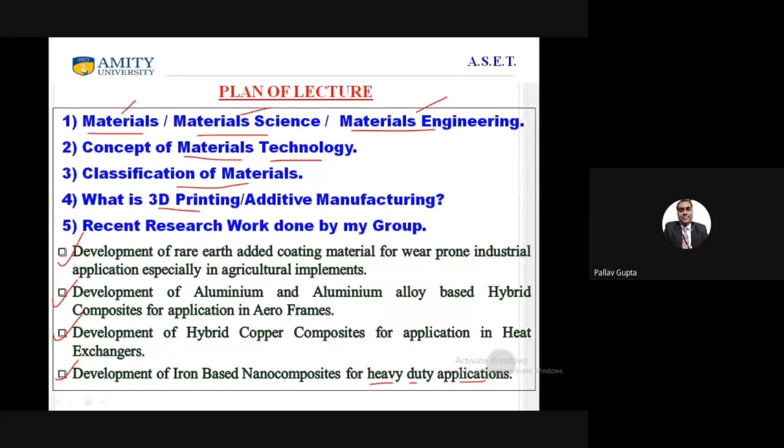Let us now start with the main stream, wherein we will be discussing the basic difference between materials, material science, and materials engineering.

When we talk about material, it is basically any substance which is implemented or used for humans, and when used for humans, these materials basically give comfort. Comfort can be in the form of using that material for a product, for any appliance, for any innovation-based invention, for various structural applications, for different construction industries. So a particular material or class of material can be used in different types of applications.

Apart from that, they are also used as concrete, steel, glass, rubber, aluminum, copper, paper, and plastic. So all these materials listed here are essentially important for making the life of a particular human comfortable.

Materials which are being used, whether for industrial applications, domestic applications, or research and development, all these materials are somewhere or the other providing a high amount of comfort to a particular class of human being, or serving mankind.

Now what is the next thing? That is material science. How is material science important? First of all, let us try to understand what is science.

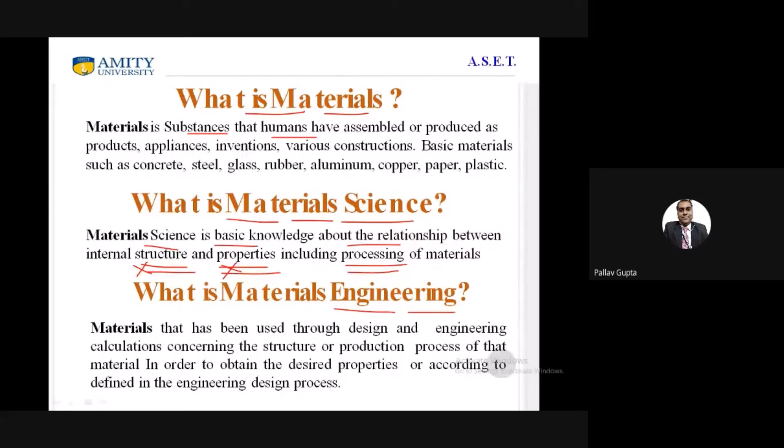If we talk about the concept of materials technology, which is a very important topic, it is a combination of several things. It is having a basic knowledge of material, knowledge of structure, property, manufacturing, and efficiency of engineering materials, and also knowledge of various types of material.

Above all, when these three parameters - material science, materials engineering, and the concept of materials technology - are considered, there is a coordination or correlation in establishing a relationship between structure, properties, efficiency, and processing, which will definitely produce a material that provides strong support to society.

So this establishment between structure, properties, efficiency, and processing is a four-pillar concept. The correlation between these four pillars will definitely lead to the development of a new material that will support our society.

Now if we give a recent example, if we talk about the challenges we are facing - our defense sector or defense technology is receiving a lot of challenges nowadays. I was in a meeting at DRDO a few days back, discussing one of my projects with them. They said that every day DRDO people are facing a new type of challenge, and they always want a concrete answer.

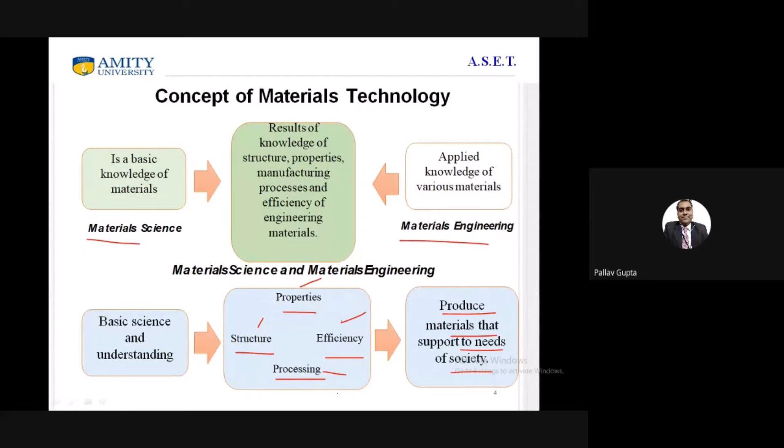That concrete answer should be supported from these four parameters - structure, properties, efficiency, and processing. So these four parameters need to be touched upon while discussing any particular application.

Now this particular coordination - this correlation and coordination - is certainly very important. What is basically the correlation or coordination, and how can it be established for a new class of material or for advanced materials? Let us try to understand.

First of all, when we talk about the usage of any material, we have to always start with the conceptualization of the effectiveness and behavior of each material. The effectiveness and behavior of each material will basically depend on three parameters: first is the structure, second is the property, and the third is the processing.

So what is basically the structure? What is basically property? What is basically processing? Structure means the interatomic bonding, or the interatomic variation of different particles which are constituting a particular body - that is essentially defined as the structure. Now, how does this structure play a very important role?

Suppose I am fabricating a nano composite. When fabricating a nano composite, it is essential that the matrix as well as the reinforcement, which we are using as an essential part of a nano composite - any one of the two, most probably the reinforcement - should be there in the nano form.

Nano form means less than 100 nanometers. It should essentially be less than 100 nanometers. If it is essentially less than 100 nanometers, then only we will be discussing the variable form. Variable form means we will be talking about the variable type of the property, and this property will definitely be dependent upon the size of the nano reinforcement used to form a nano composite.

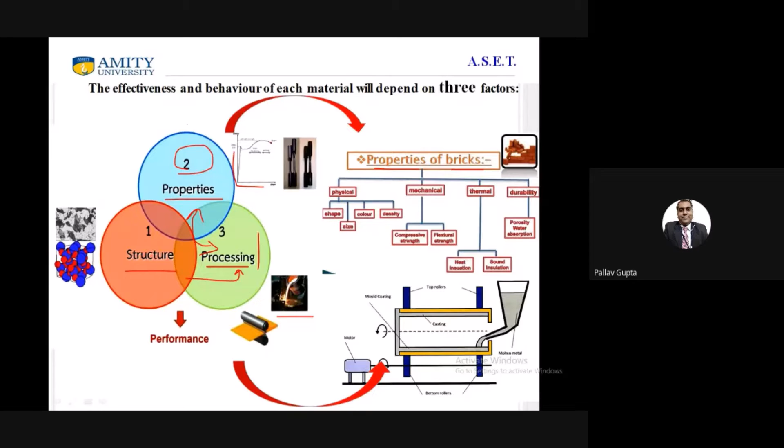Now let us try to understand the structure of a particular material. At a very basic terminology level, an atom is basically having the proton, neutron, and electron. From the atomic theory, we start up and move to the nanocrystalline phase.

We are going towards the crystalline phase, towards the bulk phase, and now developing different large scale classes of materials. All these large classes of materials are essentially important for the structure determination of any material.

If we talk about the basic ideology for a particular structure, they are basically of two types: first is crystalline, and the second is non-crystalline, which is also called amorphous.

One of the core subject areas for determining the structure is to study the microstructure. At the initial level, we look at the type of grain and how the grain boundary movement occurs, which is the structure relationship.

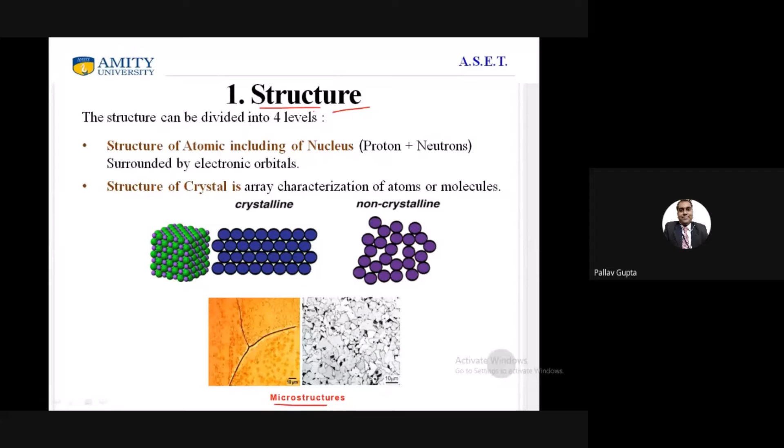We also have to look at the percentage porosity, and another important term along with porosity is the percentage purity of different types of materials. So different percentage purity of materials, structural variation, microstructure evaluation, and technological innovation being used — that is basically the discussion of the particular structure.

Now the next important thing is property. Property means the characteristics, and we have different types of properties to look upon: chemical property, physical property, mechanical property, thermal property, electrical property, and magnetic property.

For determining properties, we have compression, tension, shear, torsion, and bending — different types of tests performed under mechanical property. Mechanical properties are very important because to understand the load carrying capacity of any material, we first need to determine its mechanical property. So for evaluating different properties, we perform different types of tests, and through these tests we get desired properties, sometimes desired, sometimes undesired.

If we are getting undesired property, we have to again start from the lower end, and we have to fabricate the material and come up with that particular subject area.

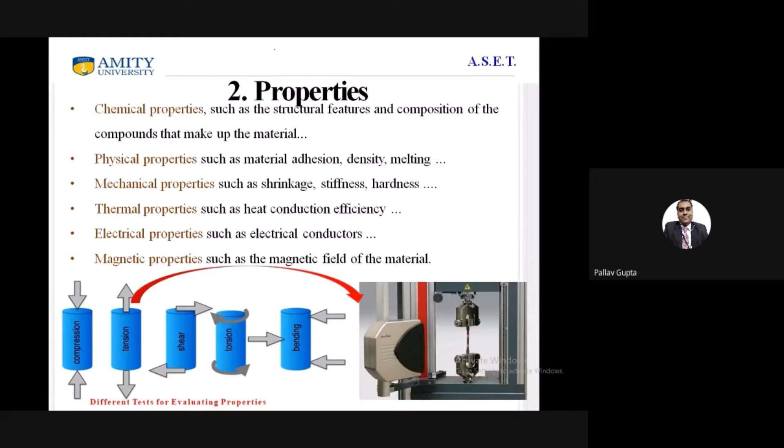Another important thing is the processing of the material. Previously we processed the material by basic processes like forging, die filling, punching, or deformation. We are using different types of processing techniques.

By using different types of processing techniques, we will definitely get different types of microstructural change. This microstructural change will definitely affect the material property. So the material property will essentially be affected by the different processing routes by virtue of which we are fabricating any class of material.

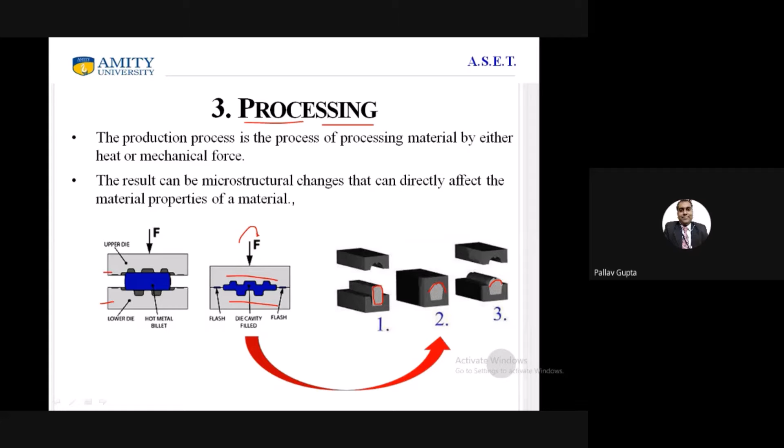So it is basically a step-up process, meaning we are moving step by step - step 1, step 2, step 3. We are moving in different steps, and we obtain the processing route by virtue of which we are moving forward.

Previously I have talked about the structure, the processing, and the properties - all three things I have already discussed beforehand. Now, one term which has just arrived is performance. What is this performance? Performance means the level of competence or degree of competence by virtue of which we can adjudge the suitability of any product or component.

In normal or layman language, how will we talk about performance evaluation? We talk about performance evaluation of any material when we say, okay, we are talking about a new class of material, a new derivative, a new structure, but ultimately, how long will it sustain? How long will it be suitable?

Then comes the concept of sustainable manufacturing. In layman language, sustainable manufacturing means that whenever you are fabricating a new class of material, how long will it be able to serve in application?

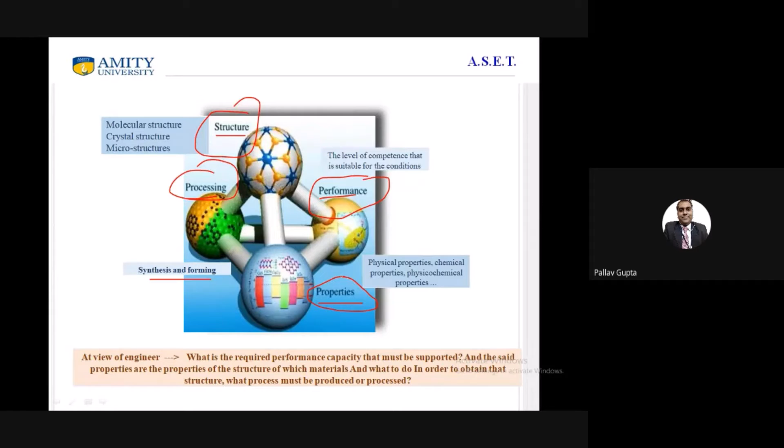Now I'm moving forward slowly towards the mainstream topic, which is the class of advanced materials. Beforehand, I have to talk about the materials we all know about. We are talking about different classes of materials, like metals, polymer, and ceramic, and by virtue of engineering ideology, we are coming up with 3 new classes of materials important from the engineering point of view, that is composite, semiconductor, and biomaterials. These are 3 classes of materials essentially important for our future directions, talking about our future directions in our present R&D field.

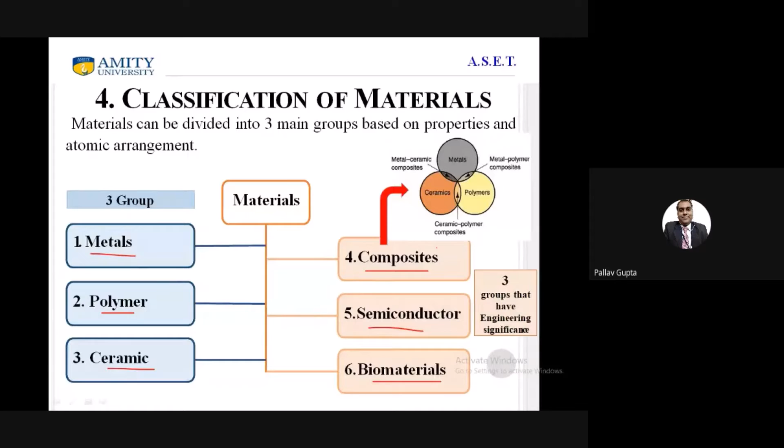So what is basically metal, polymer, and ceramic? You all are aware that metals are of ferrous and non-ferrous type. Polymers are thermoplastic and thermoset. Then we have ceramics, which are basically able to withstand high temperature. Then we talk about composites, which are basically a combination of matrix and reinforcements.

And then finally we talk about semiconductors, which are basically the resultant of doping. So N-type, P-type dopings are there, intrinsic and extrinsic semiconductors are there, holes and electrons are there, one providing the charge carrier, the other providing the pathway. And then we are fabricating miniaturized devices, called semiconductor devices. Long back we had very big semiconductor devices, but now we are talking about the concept of miniaturization, dealing with operational amplifiers, resistors, capacitors, transistors, diodes, integrated circuits. All these parameters come under the category of semiconductor devices.

So the last topic, very much important over here, is talking about biomaterials. Bioimplants were essentially very important previously, and now they have become essentially more important when we are talking about 3D printing technology.

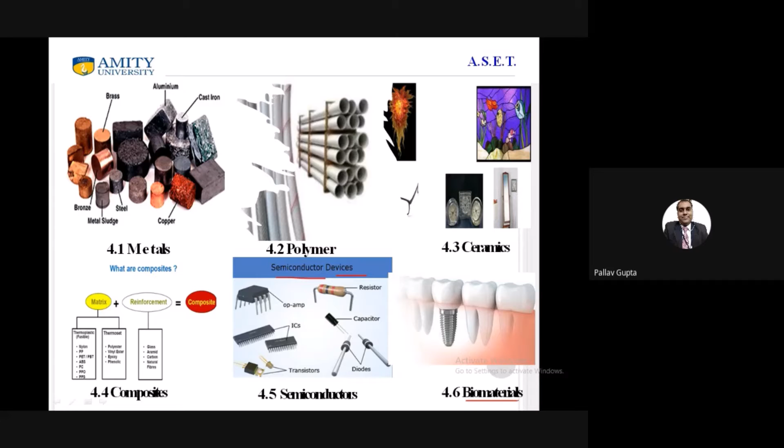In 3D printing technology, because it is a cleaner, safest, easiest, scrap-free technology, nowadays biomaterials are becoming more important for various types of bone implants, for teeth growth, and joining of bones. All these things have become quite easy while using biomaterials. So this concept of biomaterials, or biomaterials being used in additive manufacturing, is becoming a very important field nowadays in the biotechnology issue. This is very important.

Now, what is basically composite material? Composite is basically a combination of two materials, in which one is the matrix phase, and the second is the fiber, filament, or reinforcement. It basically has good shear properties. Along with that, it has high strength, high stiffness, and low density properties, which are very important for all of us to understand. Another important thing is the classification of composite material.

The classification of composite material is basically on two bases: first is the matrix itself, and second is the reinforcement. When we talk about the matrix, it can be metal matrix, ceramic matrix, polymer matrix, and sometimes carbon-carbon, and then we talk about hybrid. Hybrid materials nowadays are becoming more in fashion and more in use because of their unique characteristics.

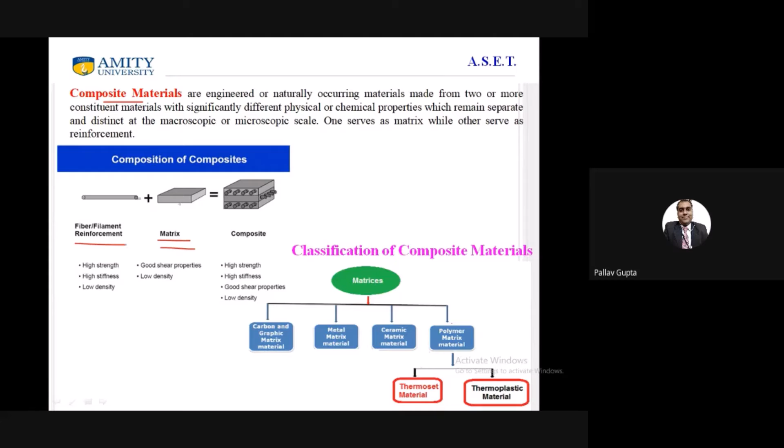So when we talk about the classification of composite material, we have metal matrix composite, polymer matrix composite, and ceramic matrix composite. In metal matrix composite, the matrix is metal, and the reinforcement is ceramic material. Metal matrix composite was initially developed around 30 years back, but nowadays we are moving forward to hybrid metal matrix composites, in which we use at least 2 ceramic reinforcements, each having its own utility in providing added benefits to the metal.

Another important field nowadays, used in the current scenario of 3D printing and additive manufacturing, is the usage of the alloy matrix. Previously we were using simple metal, but nowadays we are basically using a matrix made up of alloy, having different reinforcements. Sometimes we use graphite, sometimes silicon carbide, boron nitride, and so on and so forth.

Then comes the second important class of material, the polymer matrix composite. In polymer matrix composite, the matrix is of polymer itself, and we use a ceramic reinforcement, having basically glass fiber and whiskers used as reinforcement in this polymeric material. A large class of polymeric materials exists nowadays, and the basic idea behind using this polymeric material is that it has a low melting point and enhanced properties. So polymer matrix composite is becoming a very important class of material.

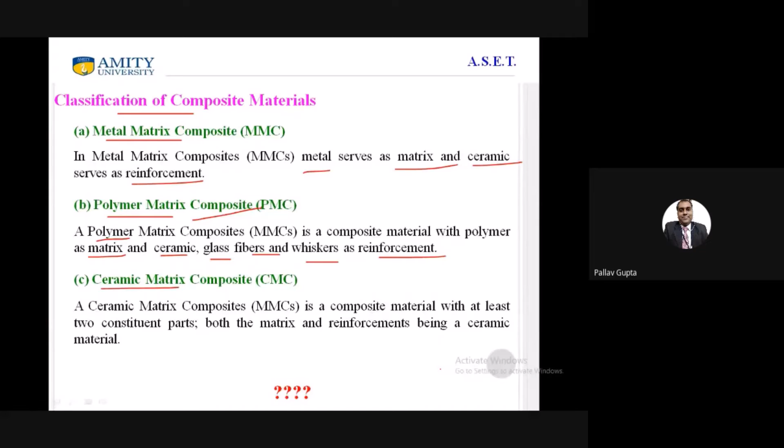Now the third important class of material is the ceramic matrix composite, also called CMC, which has both the reinforcement and the matrix made of ceramic material itself. Conventionally, we use the powder metallurgy technique, an old technique in which we do ball milling, pressing, then compaction, and then heat treatment. The final product requires the least finishing operations.

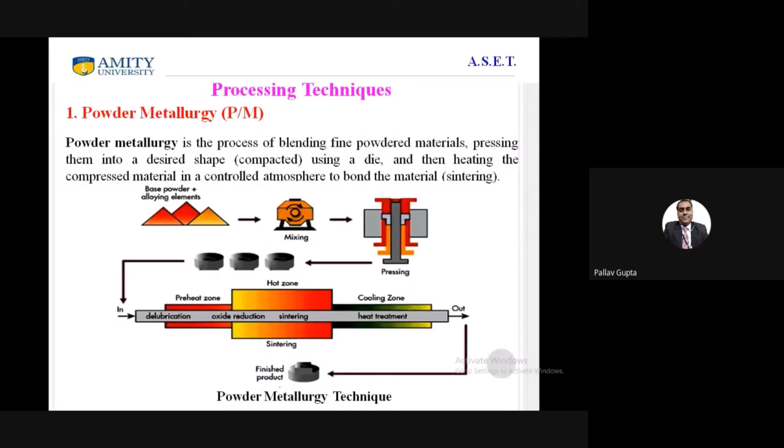Then we have the stir casting technique, in which we use a stirrer or impeller with molten material. The stirring takes place, and finally we get an output after solidification in a particular mold or die. I've spoken about this process in two lines, but it's not actually a two-line process; it has a large number of variables being used and discussed for this particular technology.

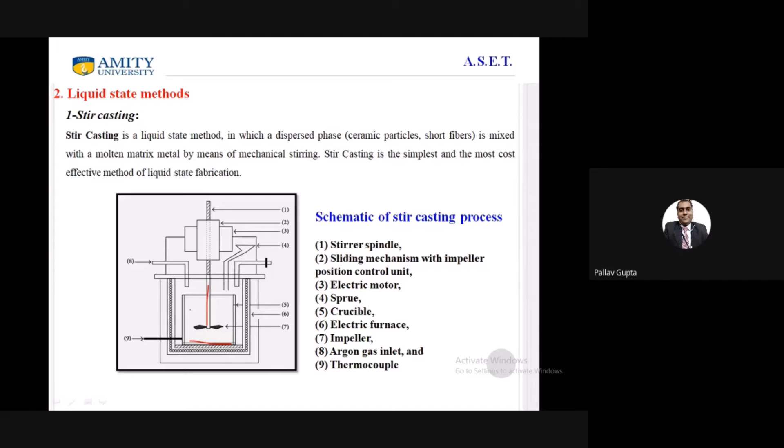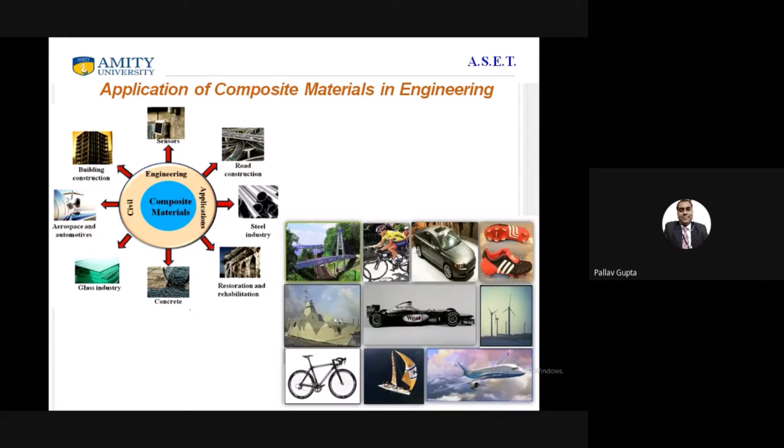Some other areas include bicycles, automobiles, shoes, different cars, ship hulls, marine, spacecraft, windmills - everywhere we are using this particular class of material, the composite. And not only metal composites, but polymer composites are also being used at variable scales.

Another important class of material used here is smart materials. Because we are moving forward to advanced materials used for additive manufacturing, smart materials are desperately being used, and they change themselves according to the environment. They respond to different types of changes that are formed in a set.

Somebody is speaking. Somebody is asking something.

Is there somebody asking something? I am hearing some voice. Okay, so I shall proceed further.

In this, what happens is there is a material which is having changes occurring according to the environment wherever they are operating. They are basically responding to changes which are set beforehand in a particular class of material. So nowadays in smart materials technology, the green building concept is being used in the field of additive manufacturing. This is basically an outcome of smart materials also.

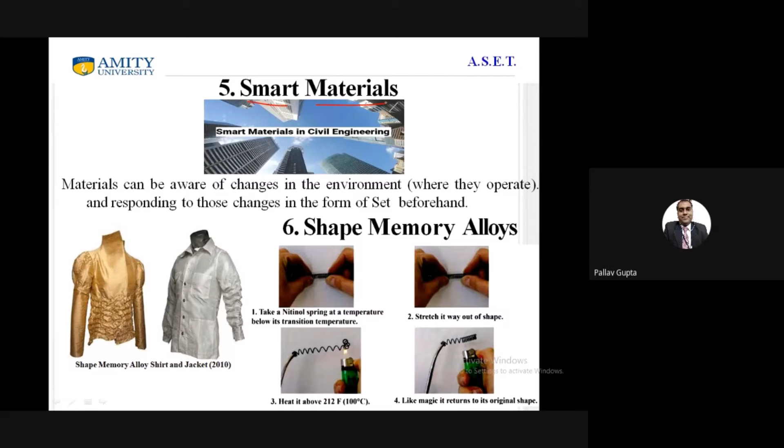Apart from smart materials, we have the next important class of materials called shape memory alloys, like the nitinol spring. At a temperature below its transition temperature, when we stretch that nitinol wire and apply heat to it, the nitinol wire comes back to its original shape. Similar is the concept for the shape memory alloy shirt and jacket, which was manufactured in the year 2010, almost a decade back, when this different type of class of material was essentially being manufactured, and a new era of smart materials was being used upon.

Now the last important area is nanomaterials. Sometimes it is written continuous, sometimes with a space, and it is a small diameter material whose diameter is not over 100 nanometers. So in nanotechnology, the material will always have a diameter below 100 nanometers, and it basically has a high ratio of surface area to volume.

So when you have high surface area to volume, it gives a large amount of strength to any material by removing the porosity or voids in between, and it will always result in physical or mechanical properties that are different from the bulk class of material. So when using a bulk class of material, the properties are different. When using a nano size material, the properties are extremely different.

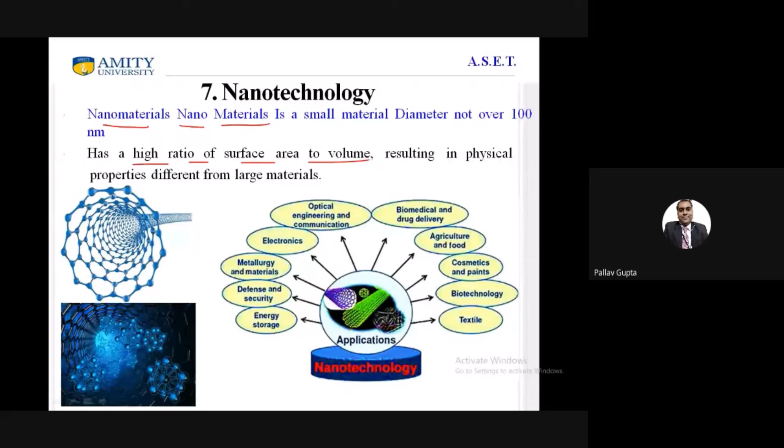This particular class of material has a different point of discussion, and these different points add value towards different fields of discussion, like optical engineering, communication, biomedical, drug delivery, agriculture and food, cosmetic and paints, biotechnology, textile, defense and security, energy storage. So there are different areas where nanotechnology is used, and these can be used in different domains, like they are now being used in the area of additive manufacturing as well.

So we are now done with the first part of today's lecture, where I discussed the basics of materials technology, why we talk about materials technology, what is the outlook of materials technology, and what are the different processing routes on the conventional side. We have talked about these many processes.

Now the next part of today's lecture will focus on what basically 3D printing or additive manufacturing is. There is a huge requirement in today's scenario where we want minimum amount of scrap out of any manufacturing process. So we require the minimum amount of scrap out of any manufacturing process being used today. And the solution to this is that we have to use 3D printing technology or additive manufacturing.

Now, somebody from these participants can suddenly ask me, what is basically 3D printing? What is basically additive manufacturing? Why is it called additive manufacturing? Why not something else?

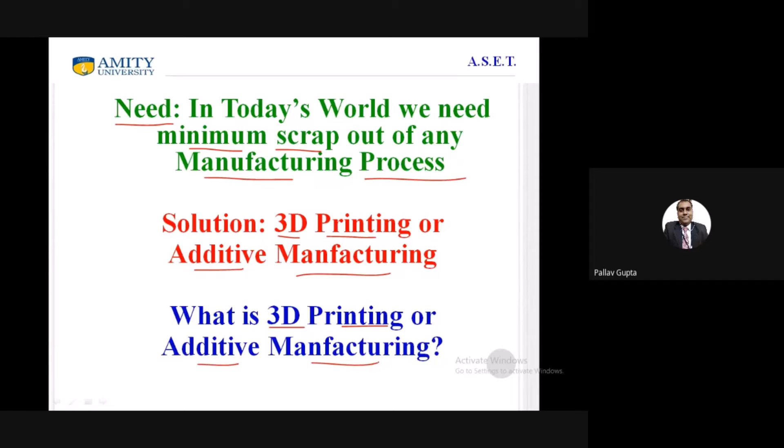This is called the scrap. The material which is removed is called scrap. Sometimes the quantity of scrap is very less, sometimes it is very high. Most often when the quantity is very less, it will go as waste.

So in this concept of metal forming, the scrap which is generated often goes into waste.

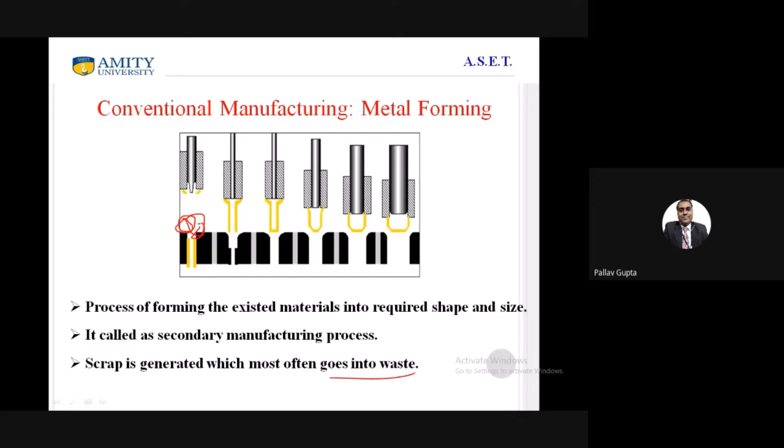Now what are the different types of manufacturing? The different types of manufacturing are, first the subtractive, second the additive. Till date what we were using is the concept of subtractive manufacturing. I do not know how many among yourselves are aware of this concept.

This waste material which is generated, nowadays in the current generation we cannot accept it. We cannot waste such a large quantity of material because the available resources are getting depleted. So we have to move with plan B.

That is, we have to talk about the concept of additive manufacturing. In this concept, we are using a material, and layer by layer, or layered deposition, takes place as per the program or set of instructions given to a printer. Then a final product will be formed, which is called a 3D object.

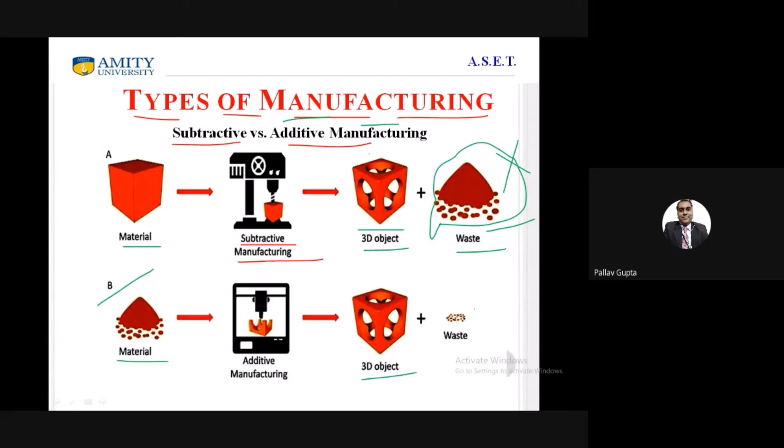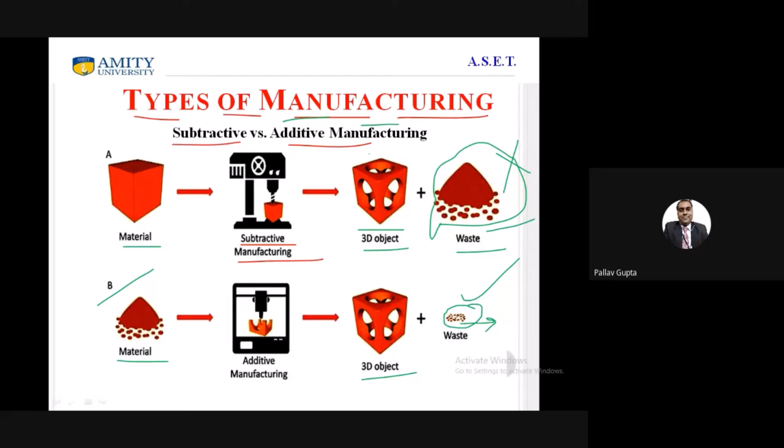And a very small amount of waste is generated, which is called the scrap. This scrap we can again recycle and use, but using a technique that should be economical as well, an economical manner in which we can fabricate.

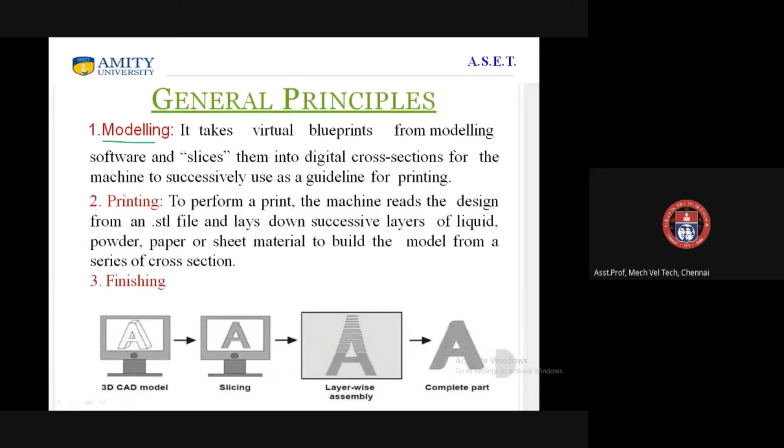Now, modeling, printing, and finishing - these are the three concept lines, or these are the three stages.

I can hear some voice. Dr. Shekhar?

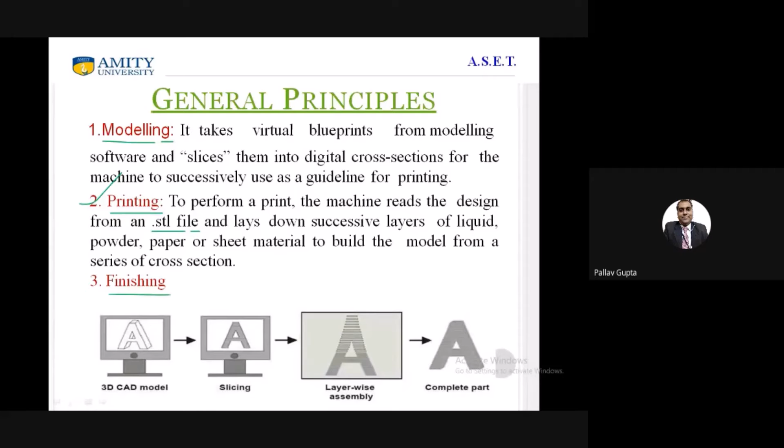Then we have the third step, called finishing. In finishing, the product or object that has been fabricated is finished upon, and a very small amount of material is left behind, which can also be recycled. So we have seen how 3D printing takes place.

3D printing takes place by the perpetual motion or movement of the designated slide from left to right or right to left, and the printer forms the item by depositing material in layer form, starting from the bottom and going to the upper end. So every time we use 3D printing technology or additive manufacturing, it always starts from the bottom end and moves to the upper end.

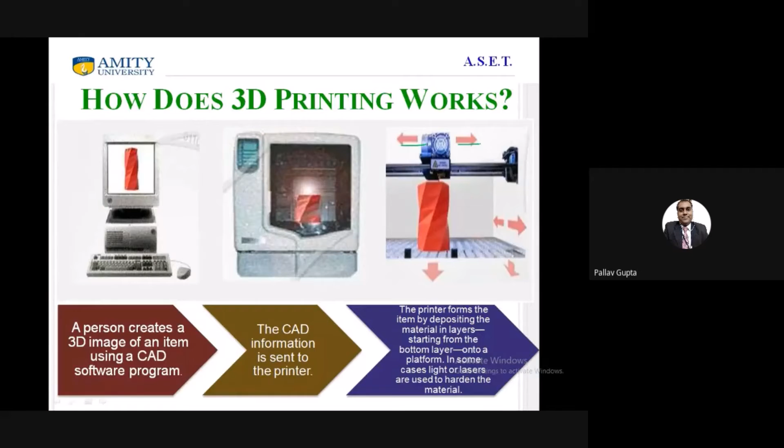The movement from bottom to upper end is, in some cases, associated with light or lasers, used for hardening the material. Sometimes there is layered deposition. Under this category of 3D printing and design, we have several techniques that are used.

Until date, there were conventional 3D materials in polymers and plastics, as well as in metals. In polymers or plastics, we were using ABS, that is acrylonitrile butadiene styrene. Second is PLA, polylactic acid, or sometimes called polylactide. Then we use TPE, which is a flexible plastic, and sometimes nylon, which is very famous. All these types of things are discussed when we talk about the conceptualization of ABS, PLA, flexible plastic, or nylon.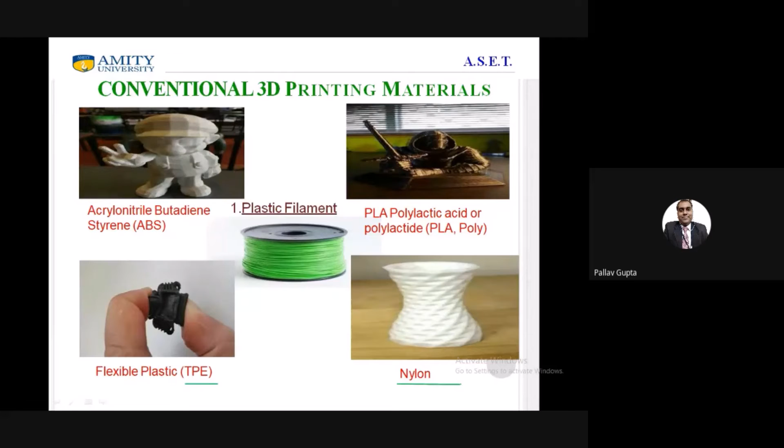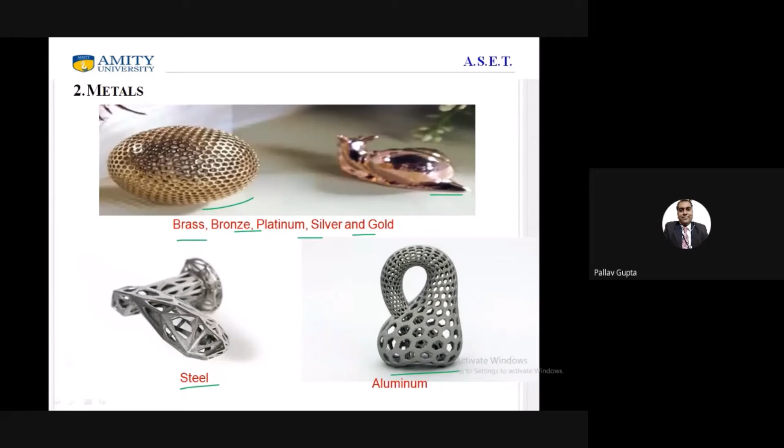Now, from this particular slide, I start my journey. I think I have about half an hour left with me.

Till now, I have discussed for 50 minutes the background area, the concept area, the conceptualizations, and the history behind the materials.

But now, in the class of advanced materials, what are the different types of materials which we are developing at our place here in Amity University? What are the facilities which we have developed here for the development of advanced materials?

This work is being done not just by me, because now I'm on a regular position. When I'm working as an assistant professor, I have been supported by a lot of collaboration. My scholars are there who are working, and this work is only possible by the input which I am getting from my scholars.

So 4 areas of discipline are essentially being worked upon right now. Because this is a 1.5 hour lecture, I will stick to giving you a glimpse. If anybody is interested, he can talk to me later, mail me, call me, or WhatsApp me, and I will be happy to take up any ideas from the participant side. Because time is a constraint here, I will discuss only 4 areas, but we are working beyond these areas as well.

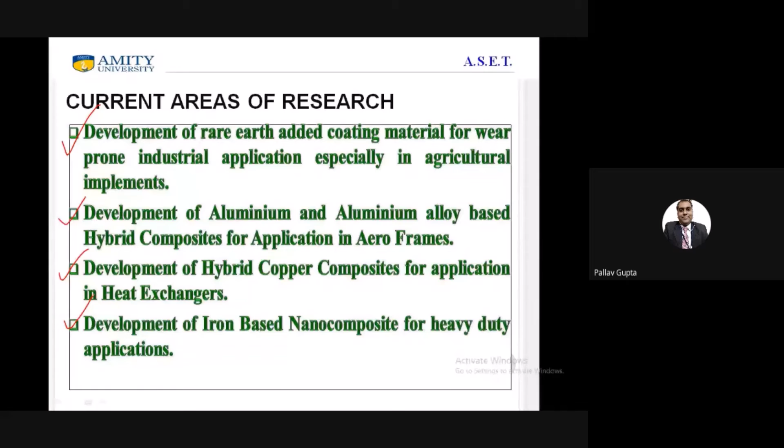Now, when we move forward to the first area, that is the development of coating technology using the thermal spray technique, because nowadays enhancing the life of material becomes a very essential process.

Enhancing the life of the material is important, because whenever any catastrophic attack occurs, or whenever an external agent like water, air, or oil attacks any material, it will definitely attack at the surface.

So when it attacks at the surface, we have to develop a coating material which can be put on that particular surface, and then we can have better life capability, or we can enhance the performance of that base material.

Now what happened here - these experiments have been done, this type of coating we have developed. Let me clarify: what we have done is that we have used cerium oxide, CeO2, as a rare earth material.

That cerium oxide, used here as a rare earth material, is added in chromium carbide and nickel chrome. These are the 2 combinations of alloy materials - chromium carbide (Cr3C2) and NiCr (nickel chrome). These are 2 different classes of materials, alloys, in which we have added cerium oxide acting as a rare earth.

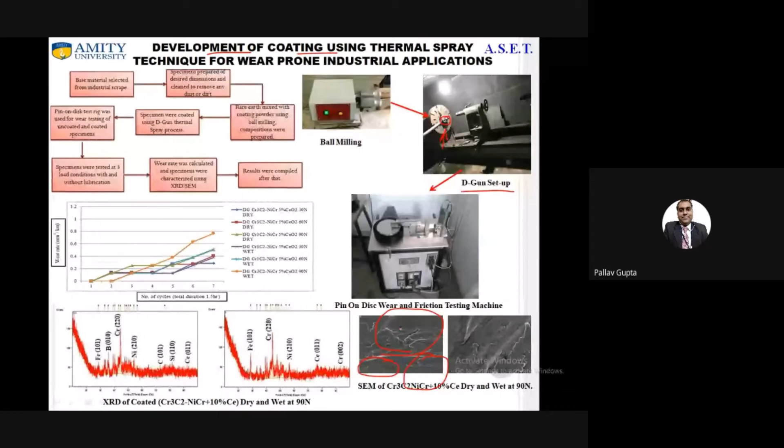Life assessment was something I was discussing in the first few slides - that is the performance of the material. So the performance was improved by 15 years. This is essentially very much important.

The second area of discussion is the development of alloy technology - aluminum alloy based technology - and then reinforcing that aluminum alloy based technology with silicon carbide and other materials. So only one material I have discussed here.

However, our group has developed around 8 to 10 materials for defense applications, and those materials developed for defense application have shown a remarkable change in properties.

What we have tried to do is fabricate the alloy first - that means fabricating an alloy of aluminum and silicon. Why? Because aluminum is lightweight and silicon gives a better deformation strength. So if we perform tests on pure aluminum silicon alloy...

If you are performing tests on aluminum silicon alloy, you can compress the aluminum silicon alloy based ingot or compact for large deformation strength. That means you can develop a large deformation strength - you can make a large plate-like structure when using aluminum and silicon based alloy.

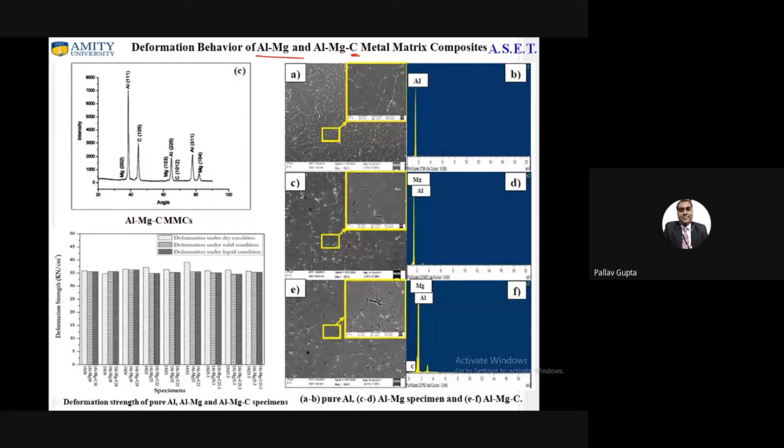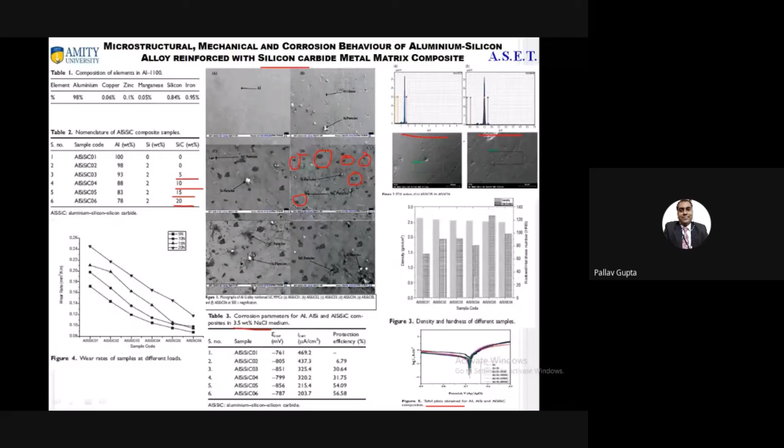In this 5% micrograph, you can see the uniform distribution taking place. For all these specimens, the deformation behavior specimen, the aluminum silicon alloy based specimen, and this copper base specimen, all these specimens were fabricated using the liquid metallurgy route by the method of stir casting furnace.

So liquid metallurgy technique has been used. We are not moving towards high-end technology; we are not buying crores of machines. What we are doing is putting our emphasis on using optimization tools. We are using conventional methods for fabricating with variation in material characteristics. We are playing with different materials.

We are varying the concentration of the materials and processing it using a conventional technique, because India cannot now move towards using crores of machines and high-end technology, as that is not at all feasible for the industry to use. You cannot replace all the industries with a new class of instruments. You cannot. So let us come back to this particular class of material.

Here, what we have done is fabricate the composite, and first we tried to understand the structural behavior. Structural behavior was studied using X-ray diffractometer, X-ray diffraction, as well as SEM and simple optical microscopy, and then we studied the corrosion characteristics.

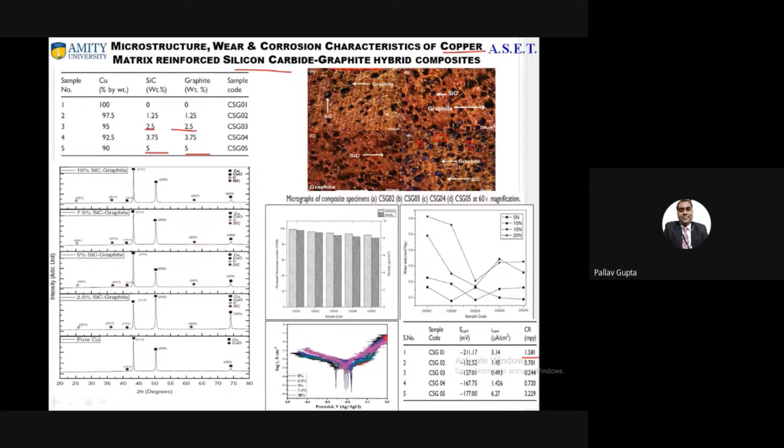Sometimes you have to optimize those things, and optimization is very much important for all of us to understand.

Now, the last class of materials which we have fabricated for additively manufactured products, or for 3D printing, is the iron silicon carbide MMCs, fabricated through the solid state sintering technique. In solid state sintering, we tried to understand the nano phase distribution, and up to which level of nano size we are able to get when dispersing silicon carbide in the pure iron matrix. We studied the structural, mechanical, and corrosion behavior properties, and how these become essential parameters.

We have studied various properties, including calculating corrosion protection efficiency, and we have also studied the tribological behavior.

We have done comparisons with pure iron and previously fabricated specimens. I have shown results here for iron silicon carbide, but we have also done a lot of study for iron aluminum oxide, iron zirconium dioxide, and for iron added with two reinforcements simultaneously, like Al2O3 and ZrO2, coming up with different results for different situations.

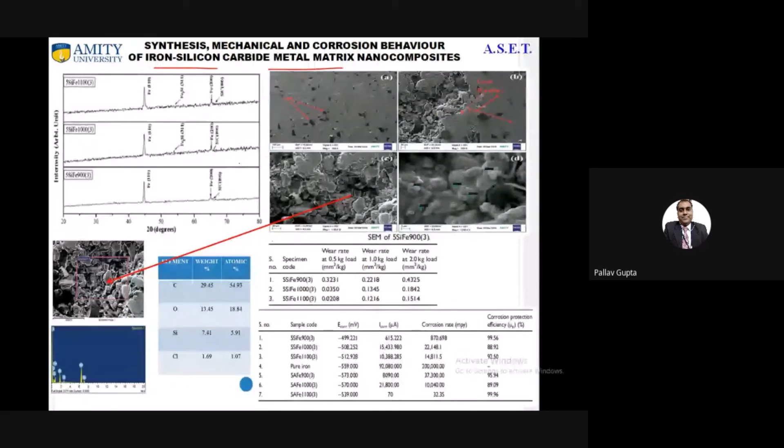With this, I think I have been left with 10 more minutes. I have been doing a lot of work here, so I say it is not possible for me to work on all these things alone.

I am always thankful to all my collaborators throughout the globe, starting from IIT BHU and ending at DMSRDE Kanpur. We work in various areas wherein large scale collaboration is very much expected and important, because many facilities are required, and at one place I cannot have all these facilities. So if I have fabrication facilities, I have to collaborate with some other researcher, scientist, or professor from another institute to move forward with sophisticated property evaluation or characterization techniques.

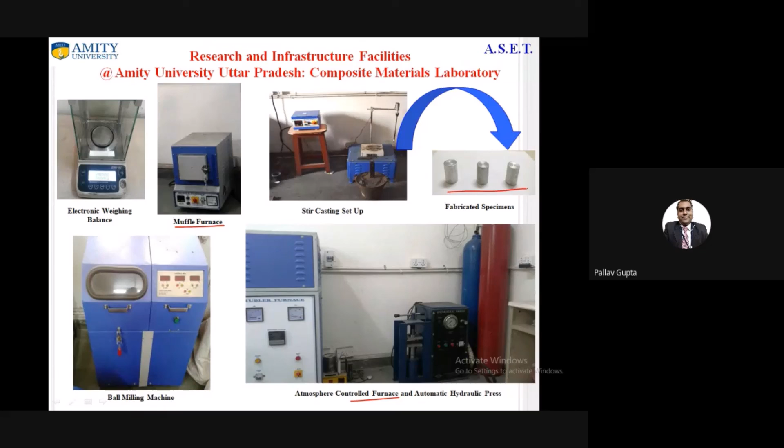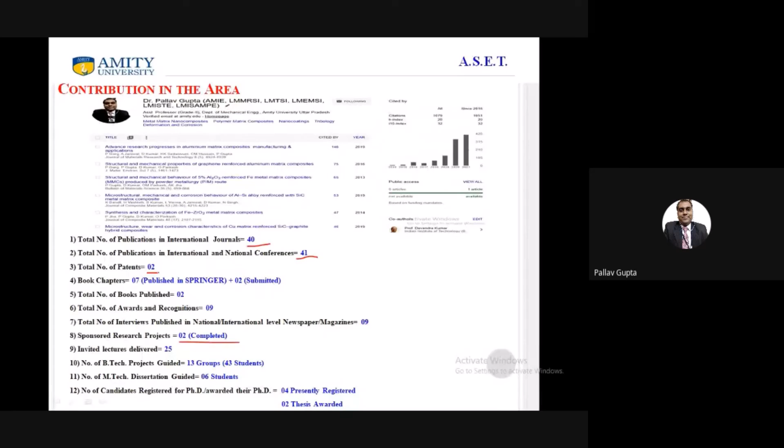Book chapters have been published. More recently, we have filed two patents. The recent patent we have filed is towards composite-based technology being used as an essential material for sensors. Nowadays composites are being used for sensor technology, where we play with different types of materials and yield an output. This is quite important to be understood.

Thank you for your kind attention. I think I finished well within time. We have a few more minutes, and we can have question and answer from the participant side as well.